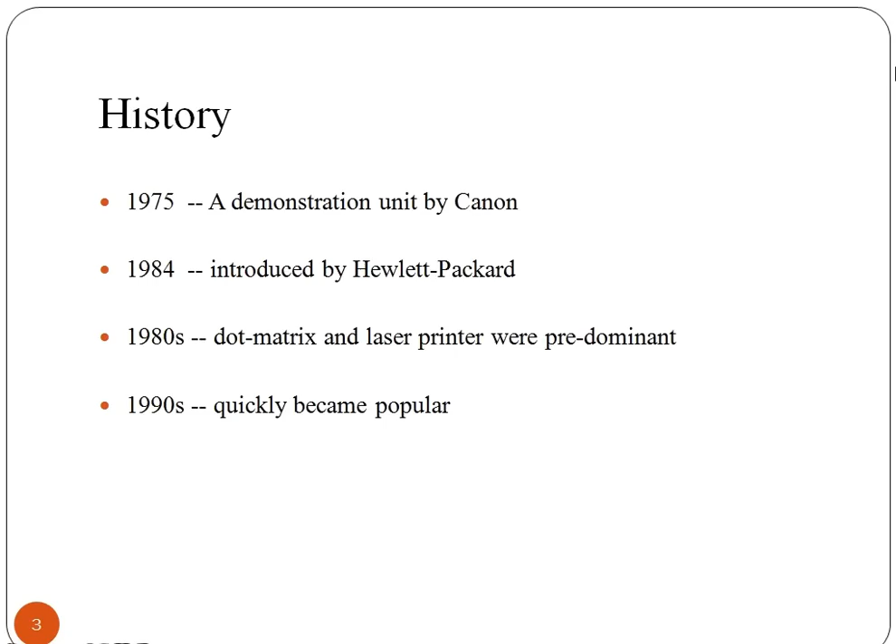After transferring to the recently formed Palo Alto Research Center in 1971, Starkweather adapted a Xerox 7000 copier to create SLOT, that is, Scanned Laser Output Terminal. The first laser printer designed for office use reached market in 1981.

The main advantages of laser printer are speed, precision and economy. A laser can move very quickly, so it can write with much greater speed than an inkjet. Laser printers tend to be more expensive than inkjet printers, but it doesn't cost much to keep them running. The toner powder is cheap and lasts a long time. When they were first introduced, laser printers were too expensive to use as a personal printer.

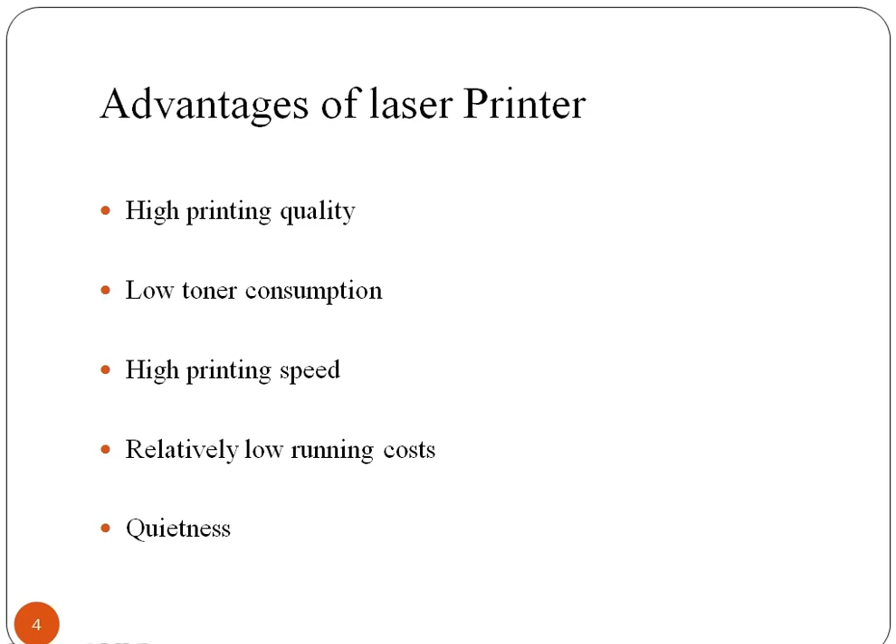The following are the main parts of a laser printer. These are drum, high voltage power supply, DC power supply, paper transport, primary corona, transfer corona, fusing roller and controllers. Now, the drum inside the toner cartridge is photosensitive. Let's study these parts in detail.

The drum inside the toner cartridge is photosensitive, which means it reacts to light. The drum holds an electrostatic charge. The laser beam is reflected onto the surface of drum to create a pattern of charged and not so charged spots representing the image of page to be printed.

High voltage power supply. The process uses very high voltage to charge the drum and transfer and hold the toner on the paper. The high voltage power supply converts AC current into higher voltages used by the printer. DC power supply. Like a computer, most of the electronic components in the laser printer use direct current. For example, logic circuit uses 5 volt DC and paper transport motor uses 24 volt DC.

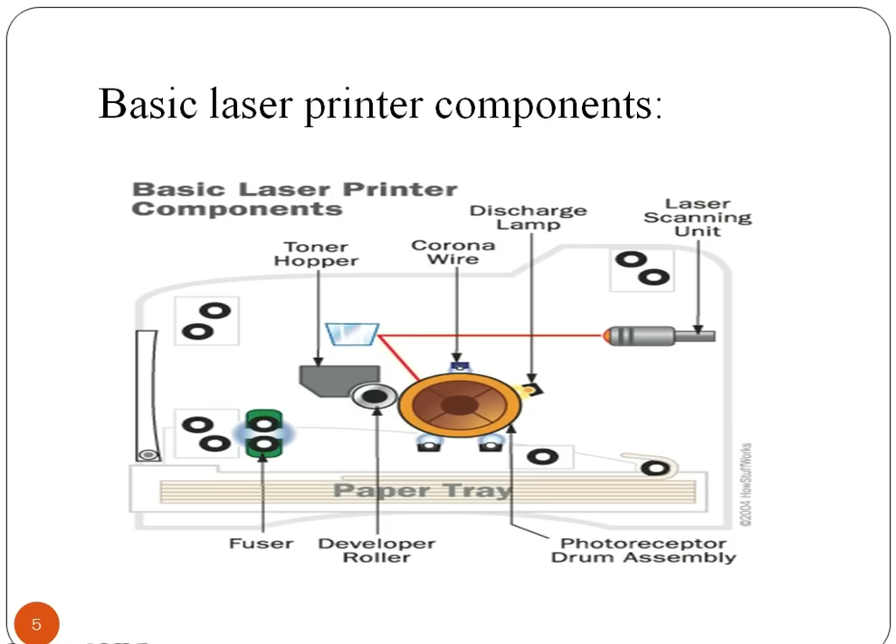Let's understand working of laser printer. A laser is a device which emits light through a process of optical amplification based on stimulated emission of electromagnetic radiation. It rapidly produces high quality text and graphics by repeatedly passing a laser beam back and forth over an electron charged cylindrical drum to define a differentially-charged image. The drum then selectively collects electrically charged powder ink and transfers the image to the loaded paper.

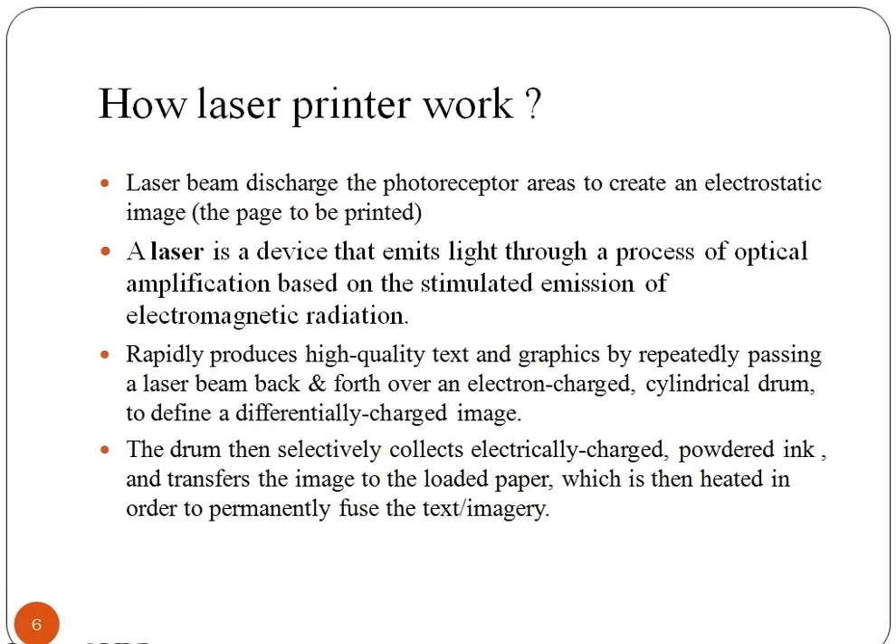Let's look at different processes of laser printer. These are cleaning, conditioning, writing, developing, transferring and fusing. Cleaning process. The drum is swept with a rubber blade and a fluorescent lamp removes any electrical charge remaining on the drum. An electrostatic charge is then projected onto a revolving photosensitive drum inside the printer.

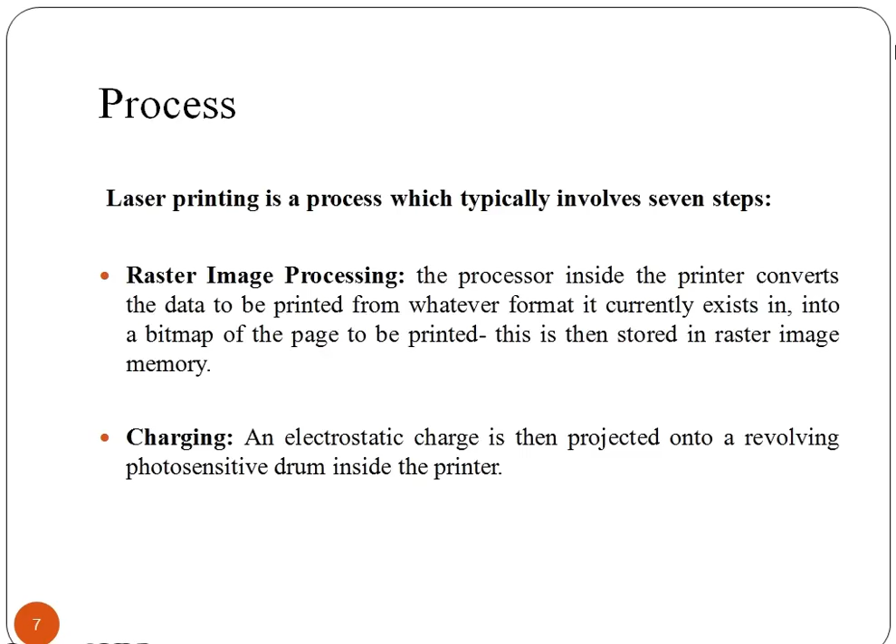Writing. The laser printer controller uses a laser beam and a series of mirrors to create the image of the page on the drum. The laser beam is turned on and off in accordance with an image to be created on the drum. At the spot where the laser light contacts the photosensitive drum, the charge is reduced. After the entire image has been transferred to the drum, the controller starts the page sheet through the printer, stopping it at the registration roller.

Now, what is developing? A magnet inside the developing roller attracts the iron particles in a toner. This roller rotates near the drum and the toner is attracted to the areas of the drum that have been exposed by the laser. It creates the print image on the drum.

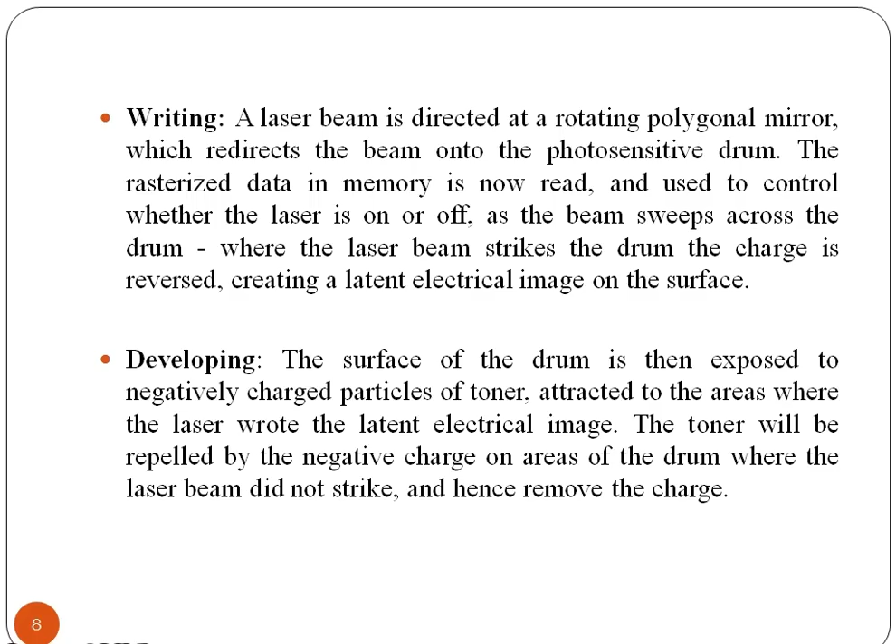Now look at the transferring process. The back of the paper sheet is given a positive charge that attracts the negatively charged toner from the drum onto the paper as it passes. After this step, the paper has the image of page on it.

But the toner, which is held only by simple electrostatic attraction, is not yet bonded to it. After this, the fusing process comes. The fusing roller applies heat and pressure to the toner, which melts and presses it into the paper to create a permanent bond. The rollers are covered with Teflon and treated with a light silicone oil to keep the paper from sticking to them.

Your printer will have come with a user manual that should explain the necessary cleaning and maintenance. On the manufacturer website, you will find the support section where you can download support details on their product.

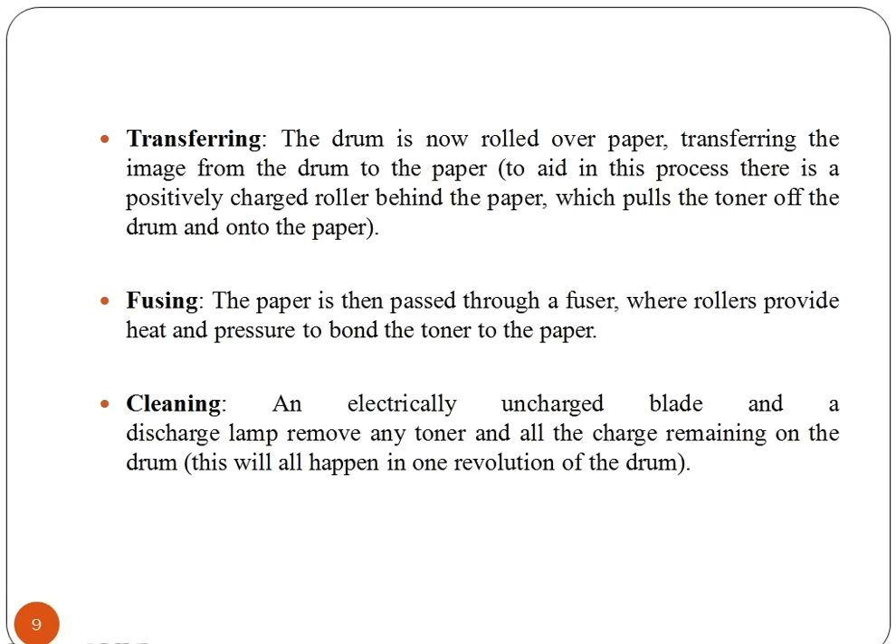Next is conditioning. The entire drum is uniformly charged by a primary corona wire. This charge conditions the drum for the next step.

Let's look at the precautions to be taken while using a laser printer. To avoid hurting yourself, never put your hands in the internal mechanism of a printer. Laser printers contain parts that reach high temperatures, so be alert and do not touch such parts directly. Always pause or stop a print job before you try to service the printer, especially to top up toner or ink.

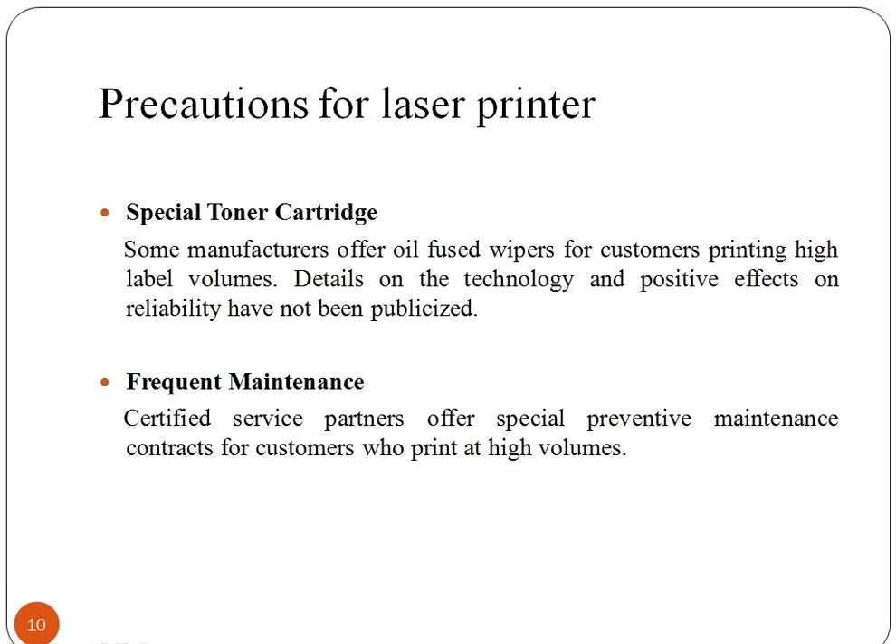Frequent maintenance is required to avoid any chances of damage to the printer. Toner contains minute particles of coloring agent and plastic with abrasive properties that human skin, eyes, and lungs can't tolerate. Ink can stain furniture and clothing, so be careful while using them. Once you install an ink cartridge, leave it in place to avoid drying it out and wasting ink.

Special adhesive. Some label production companies offer special non-ooze adhesive to prevent jams. However, this non-ooze adhesive does not offer a permanent bond.

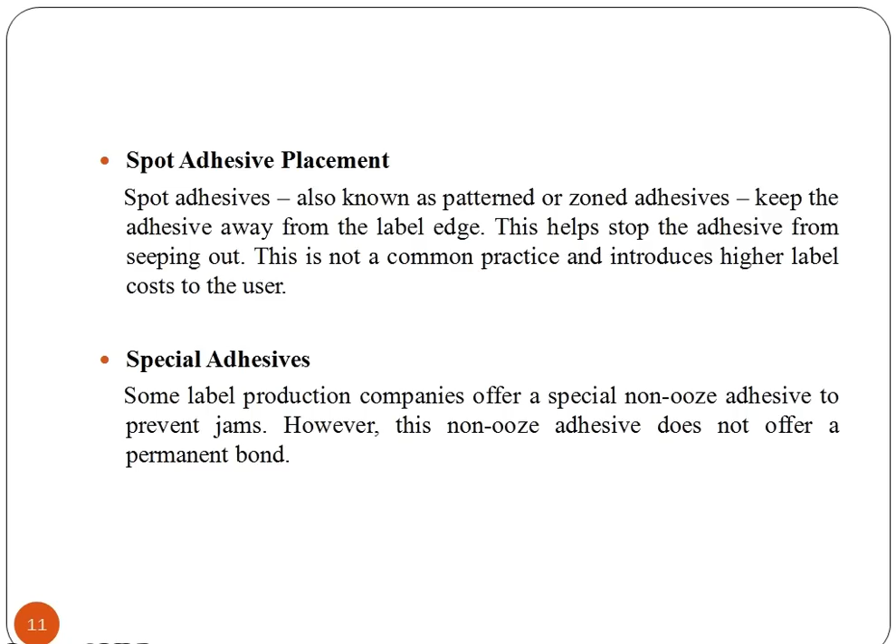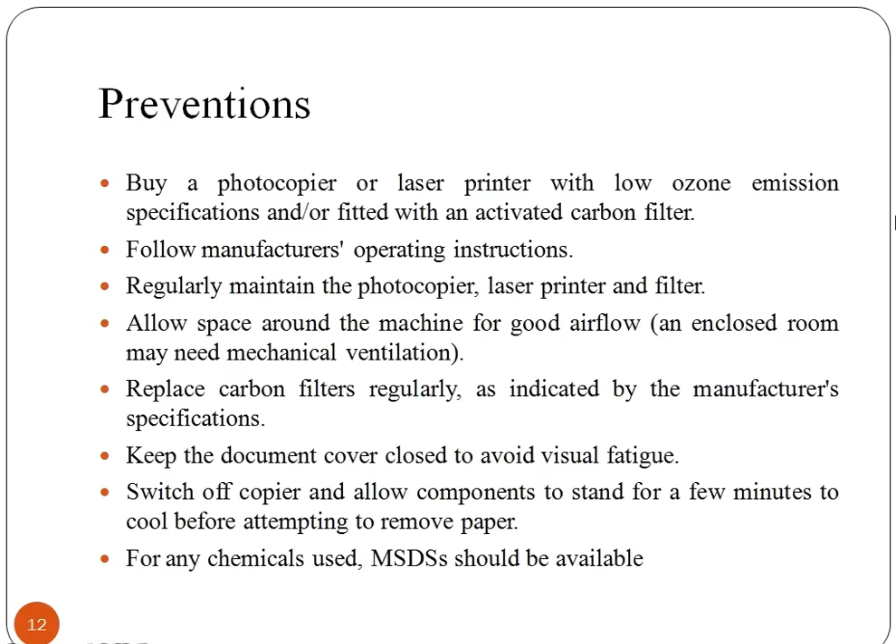What are the precautions to be taken? Printers can emit noise, heat, volatile organic compounds and other forms of pollution. Avoid setting up the printer next to your work desk. Ideally, it is best to place the printer far enough away from people to avoid harm and near enough to avoid the need for a long cable. Always keep the document cover closed to avoid visual fatigue. Allow space around the machine for good airflow.

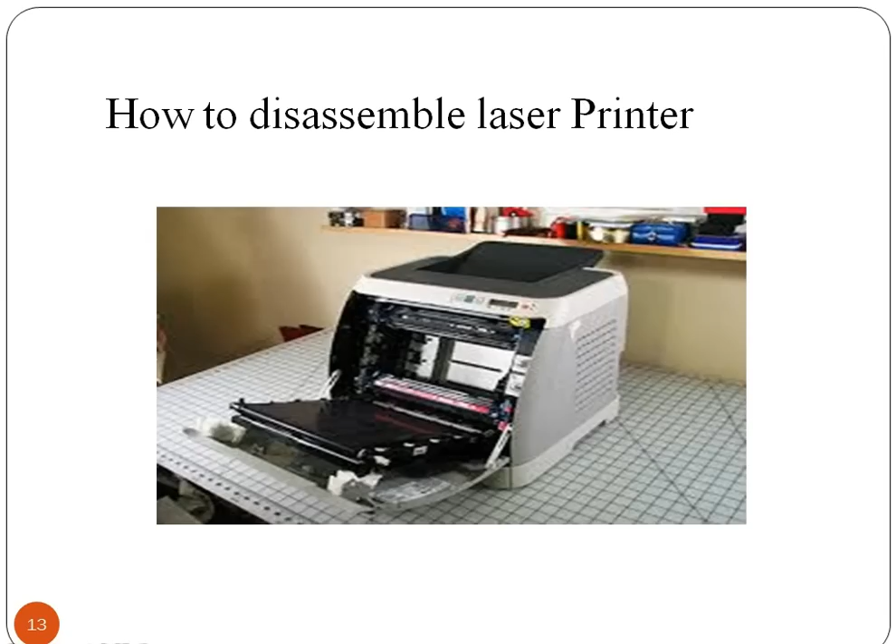Now look at the disassembling procedure of a laser printer. For this purpose, you require some tools such as a screwdriver, needle nose pliers, side cutter, and a cardboard box. Let's start the disassembling process. Firstly, open the right lateral cover and take the top cover out by opening the screws. Now take the left panel out by using the same process.

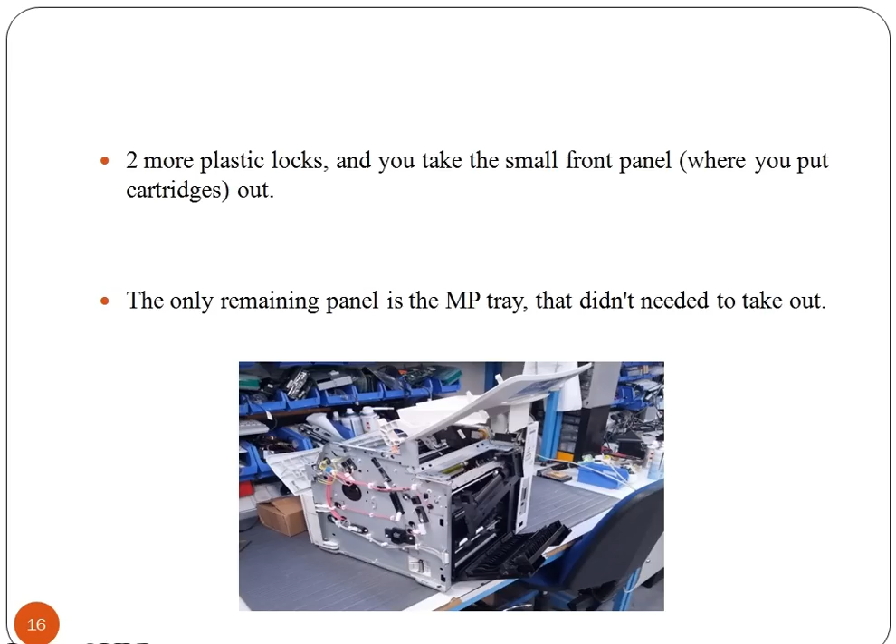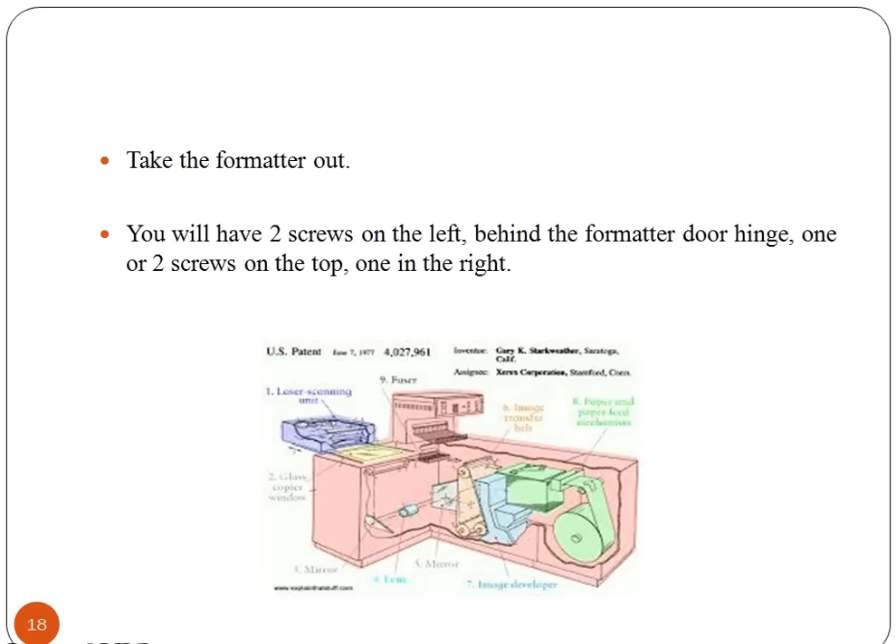There is a serial connector and a small lock on the right pin of the door. Remove the lock and take the plastic door out of the printer. There are two more plastic locks. Firstly unlock them and take the front panel out. Now to remove the formatter door, push the plastic pin in the middle of the hinges and take the door out. Now take the formatter out by unscrewing the screws.

After this you are able to see the main motor. Open the screws and take the motor out. To remove the gear unit inside a module, open the screw at the back side of the motor board. To remove the fuser assembly, firstly open the screw and then push up and back to take it out.

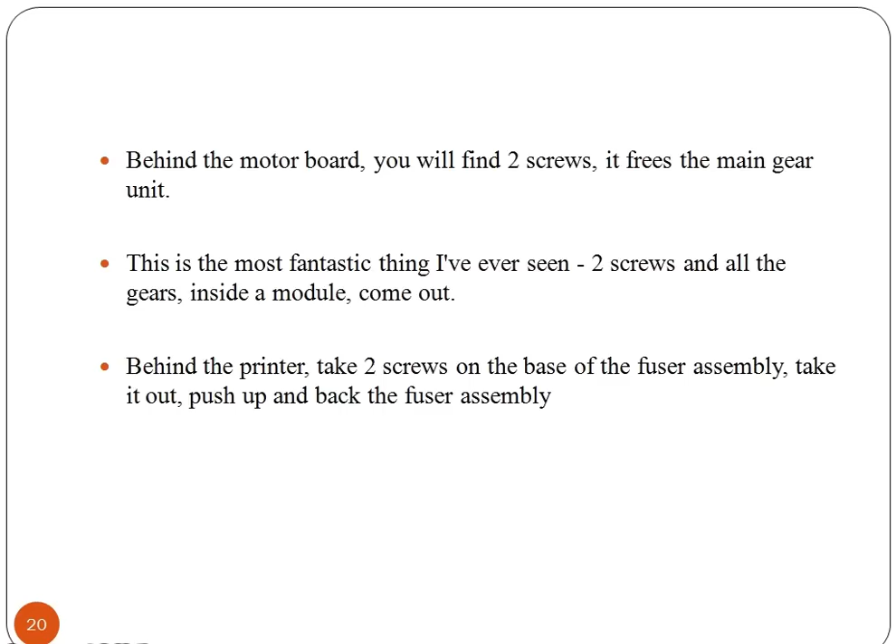There are two screws on the printer connector which hold the cooling fan. Unscrew them and remove the cooling fan. Unlock the plastic lock, remove the ventilation column and clean it. There are two plastic locks on the back of the assembly that transports the paper to the top of the printer.

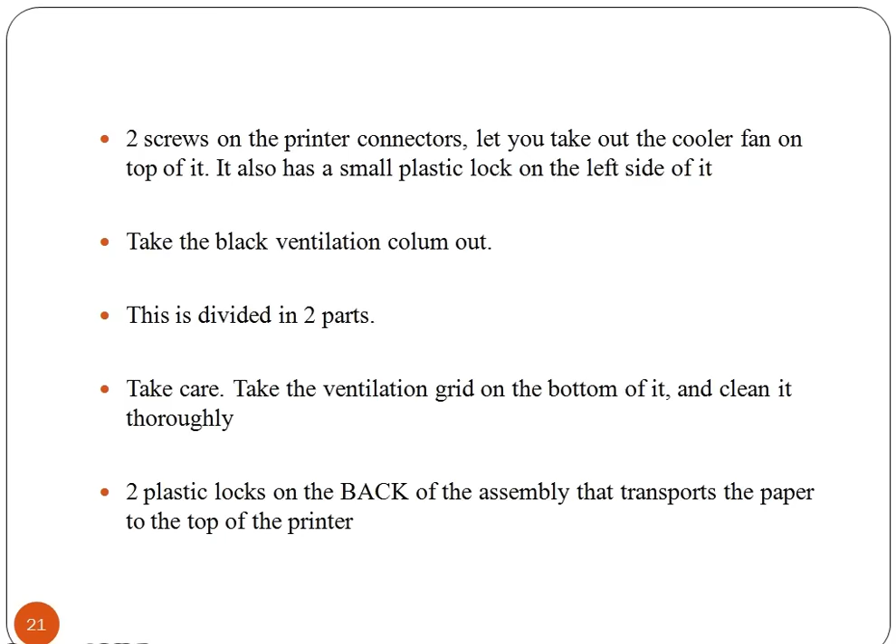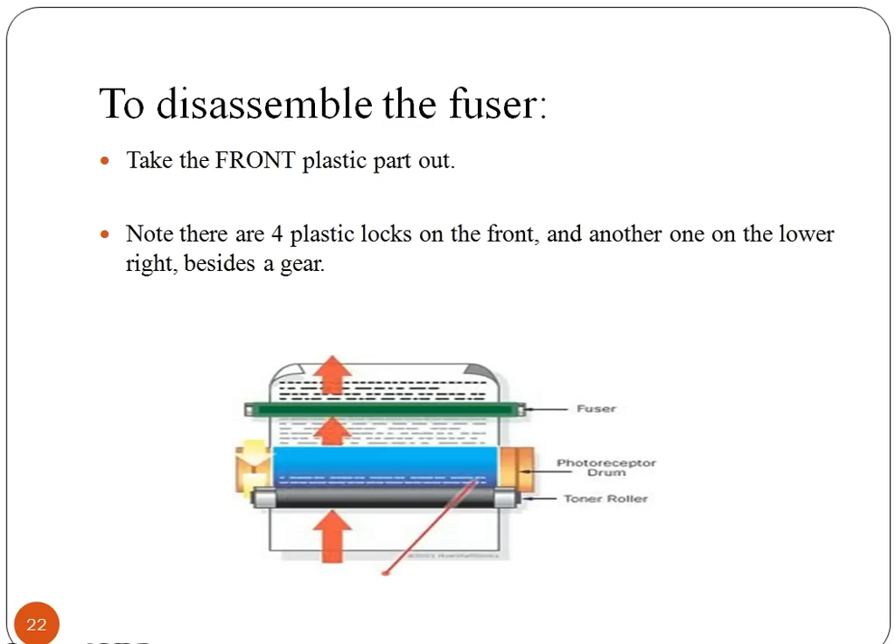Let's study how to disassemble the fuser of a laser printer. Follow these steps in order to disassemble the fuser. Firstly, take the front plastic part out by unlocking four plastic locks on the front and another one on the lower right, beside a gear. Now disconnect a terminal on the bottom of it, as this is a wire that comes from the lamp.

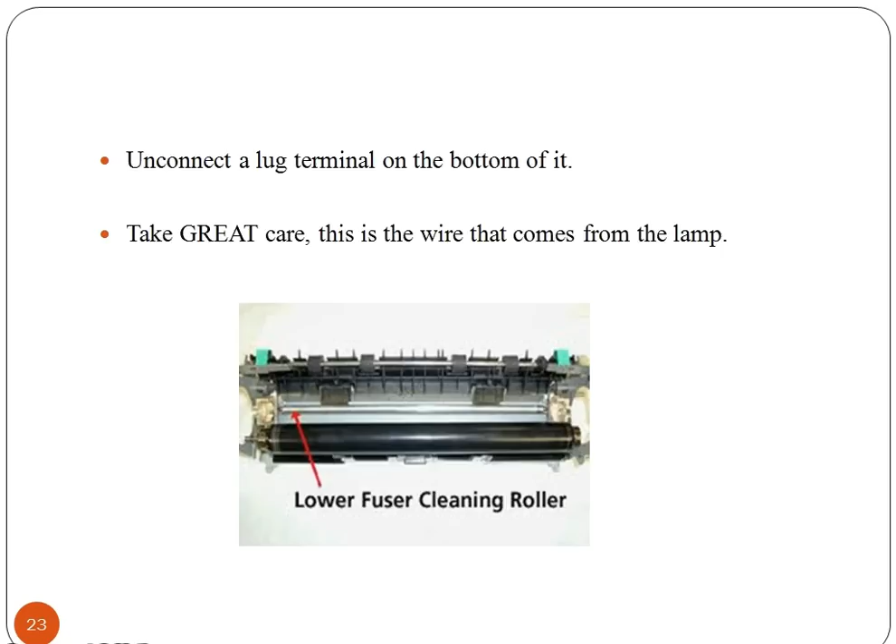Disconnect all the wires from their locks by unlocking them. To make the lamp free, unscrew the right plastic part and left plastic part. Take care with the wires and the lamp. Take the lamp out. Now you can easily remove the fuser. Now to remove the fuser gear, unlock the plastic lock from both sides.

After this, take out the metal cover of the fuser by removing two small locks between the plastic back to remove the metal cover. Clean the thermistor and don't forget to change it if it is scratched, dented or damaged.

Now unscrew the fuser roller bushing from the main fuser module and make the lower rubber roller stay far from the fuser roller. Then pick it out of the module along with the black rubber roller. Clean everything with isopropyl alcohol. The reassembly process of the laser printer is performed by following the above steps in reverse order.